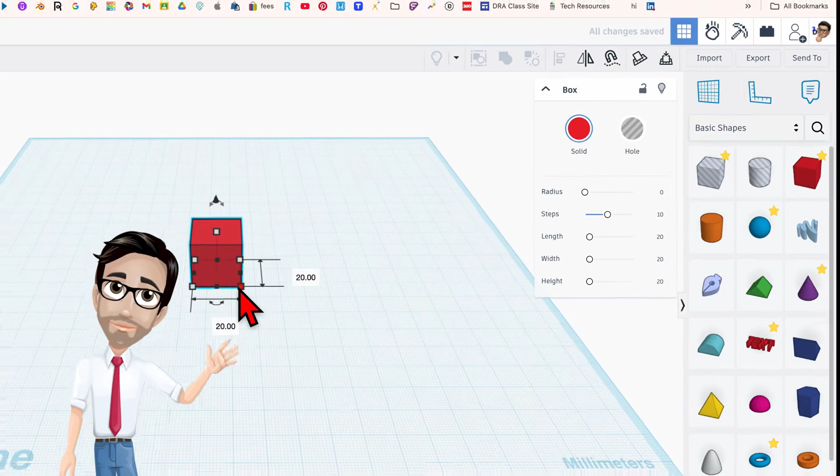We're going to start off with the box. Since it's red, we don't really have to do much to change the color. Let's play with the settings. The radius is going to be 3.56, and that curves the edges. Very nice. And the steps I'm going to make 16. There, beautiful. Now for the size going across, we're going to do 112

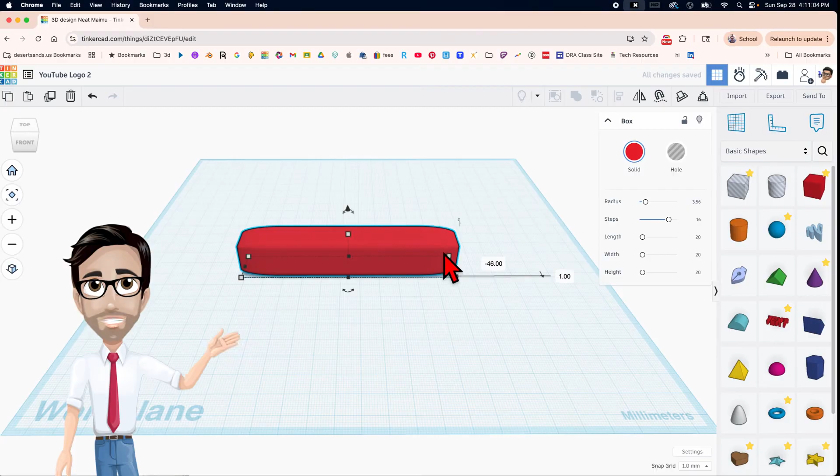112 and 63. Now the thickness is going to be 7. This is the height, 7 here. Okay, if we look at it from right here, top view. Looks great, right? But here's the problem.

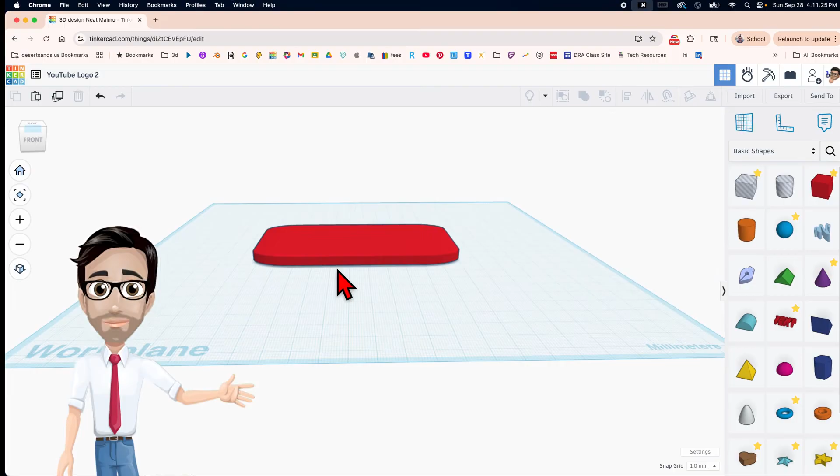Listen up, here's the problem. I've had students use this shape before, and this is what happens. The machine will print this layer right here — you see how it's a little white or lighter, like a pink color — and all this will be completely fine. But then the machine will start printing all of this in midair because we don't add any supports.

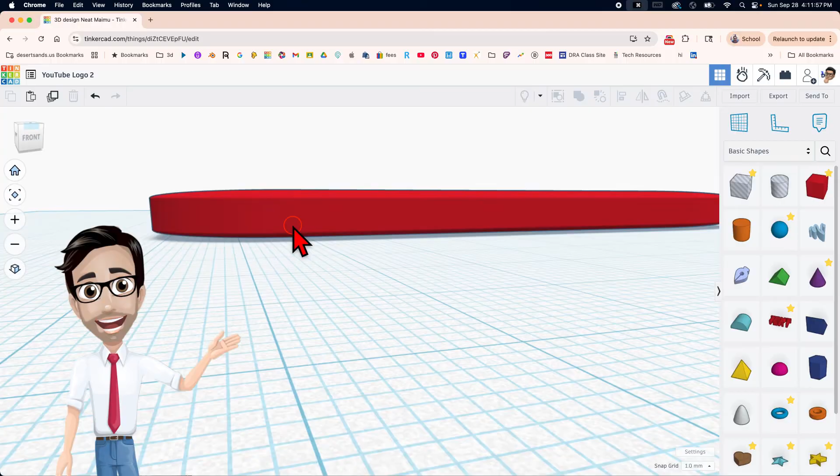Now you can add supports, but there's a way around this that makes it much cleaner and better, because that curve will also appear up here and it doesn't look good. It really doesn't look good. So this is how we're going to fix that. This is true for anytime you start curving the edges — you have to do something like this if you want it to be smooth.

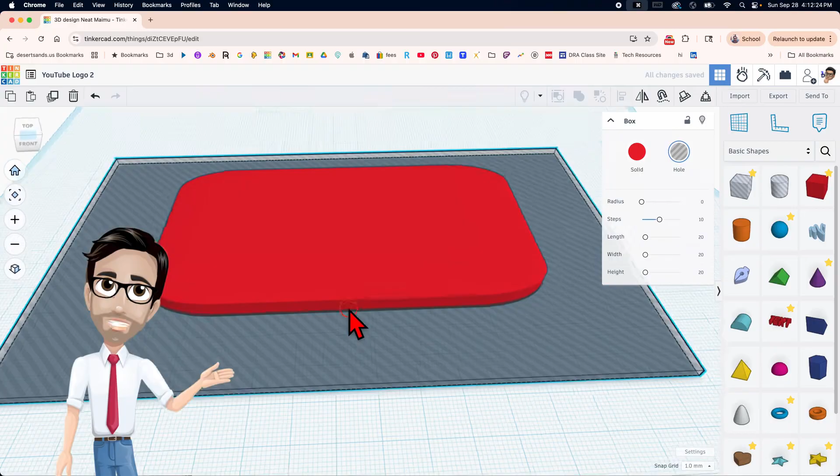So I'm going to change this to 2, and I'm just going to make this bigger than this red thing right here. Okay great, I'm going to duplicate it. Actually, let's duplicate it. I'm also going to duplicate this — Control D, or that button.

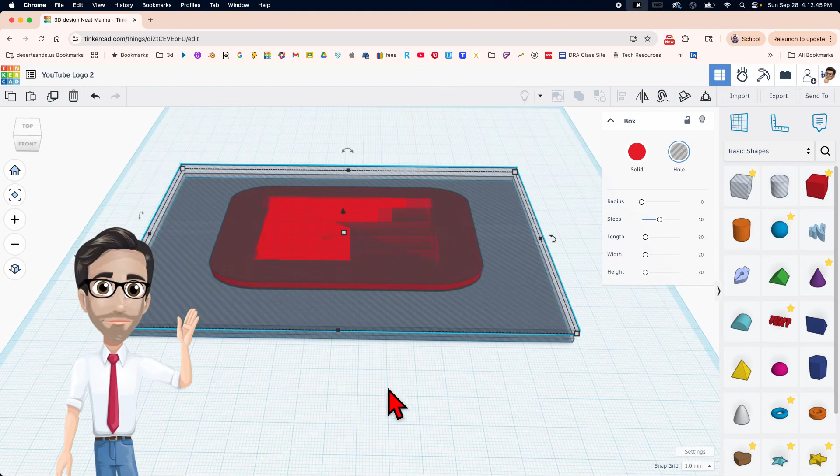I'm raising it up, by the way. I'm going to try to cover the top of this. All right, that looks like it's going to do it. Okay, we're good there. Now I'm going to select all 3 of them. Since nothing has to move and there's nothing in the way, I'm just going to click and drag over all of these and hit group. Now let's look what happens.

It is completely straight, but we retain the curves at the edge, which is what we really want. And here's another shortcut: if you have a floating object and you want it on the work plane, you click the letter D and it stops right there, right at the work plane. It is perfect. Great, let's move on.

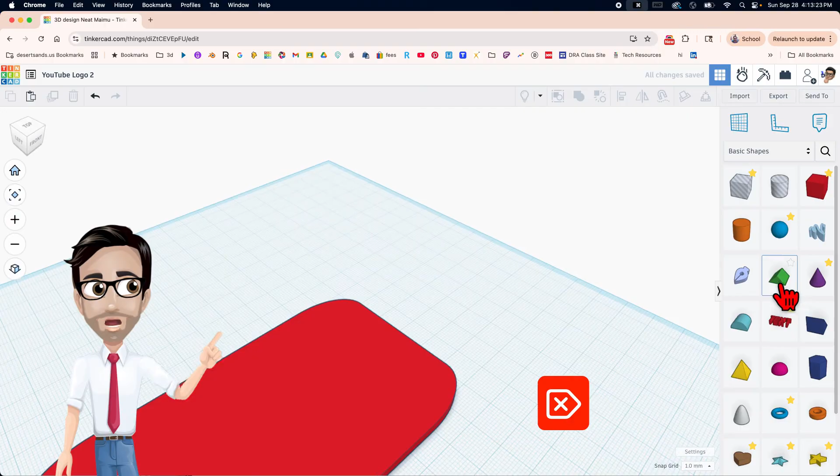We're going to need the white play button — in this case, you want the wedge. We're going to rotate this twice. I chose the wrong one, I believe. Yeah, I did — I wanted this one right here, called the roof. Let's rotate this twice, 90 degrees, so that we see this part right here, and we want another 90 over here. Notice half of this is going through the work plane, so I'm going to click the letter D.

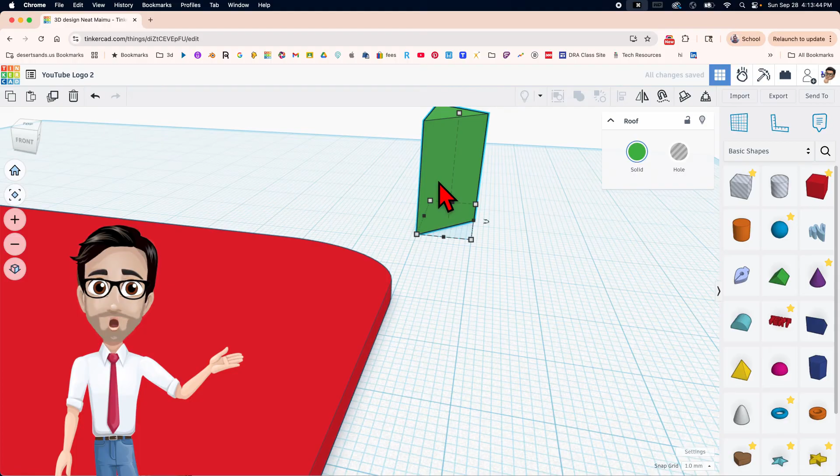Now it's on top of the work plane. Yay, problem solved, life is good. So here are the dimensions: on this side it's going to be 22, on this side 23, and the height — oh, that looked big. Okay, the height is going to be 3.5, I believe, but I think we're going to have to change this when we get over the triangle. So I click here just to make it white.

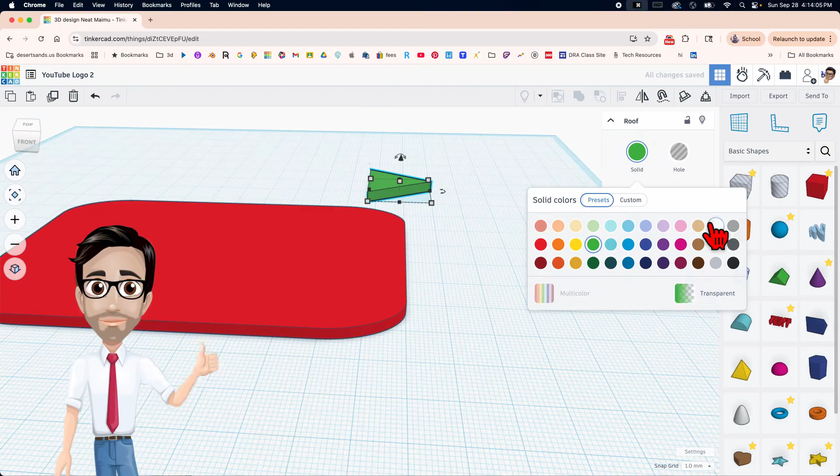Now here's the reason — oh no, it worked out perfectly. Look at that. Now if you cannot see it, you might have to raise it up a little bit. I recommend the difference between this thing and the height be about 0.5. So let me see, this is the red one, 3, this is 3.5. Now here's the question: is it centered? Is it centered?

I don't know. So here's the tool you should use to find out if something's centered. I'm going to click and drag again, and click the letter L. For you, it's this tool right here, the Align tool. I'm going to click the letter L. Great, now I have these black dots. These black dots show me stuff — they show me what would happen just by hovering over them, if I clicked on them. Okay, so let's go over here.

In this one, the triangle is going to move to be exactly aligned with the edge of this one, so it must be that this one does the same thing but on the other side. But what if I didn't want that? What if I wanted this triangle down here? There you go, it would be exactly at that corner. Obviously same thing up here. So in this case, I'm going to click the two center ones because I want them to be at the center of this object. Now here's another trick.

Let's say you didn't want this red block to move — you would click on it, and now it is stuck, it's not moving. Only this white triangle will move. See that? Now I want it to be centered in this direction. That's the Align tool. It is very helpful. I recommend you use it because it's going to save you so much time and it's going to look great.